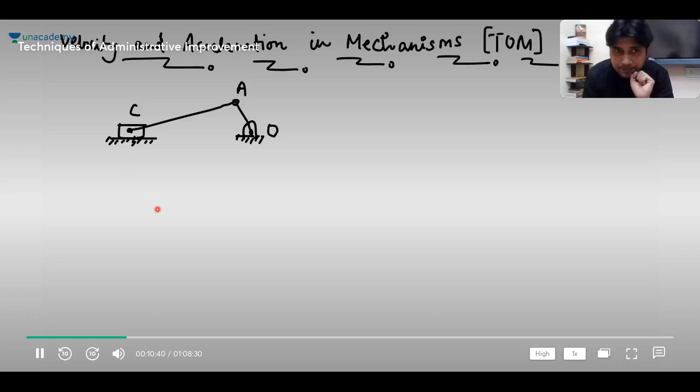In case of slider crank chain, you have a fixed center here and you have a slider here. Let me call this point as O, and let me call this connection here as A, and let me call this connection here as C.

Now let us say, please be very attentive and try understanding, because the approach that I'm going to tell you is a little new. I mean, new in the sense that you may not have learned about it, and it will require a little practice, but it's a no-brainer approach. No-brainer means once you write the very first equation, then it is a mathematics thing. You need to differentiate, differentiate, differentiate. That's it.

Suppose this connecting rod has the angle phi. And suppose this crank has got the angle theta. So please be very attentive and try understanding. Suppose the connecting rod has got the angle phi and crank has got the angle theta. Okay. And the position of the piston at any given instant is x.

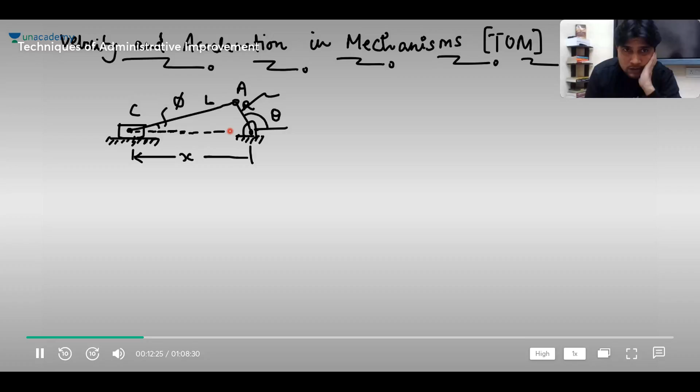Now suppose the length of the connecting rod is L and the length of the crank is R. Can you relate X and L and R? It's very easy. Think about it. My dear friends, if you drop a perpendicular here, then it's very clear. Please be very attentive and try understanding that this is L cos phi, and this one is R

cos (180 minus theta). This red one is L cos phi, and this blue one is R cos (180 minus theta). And this entire thing is what? This entire thing is X. X is the position of the slider at any given instant. Okay. This method is so beautiful that you don't have to learn a lot of theory. You can just begin right away.

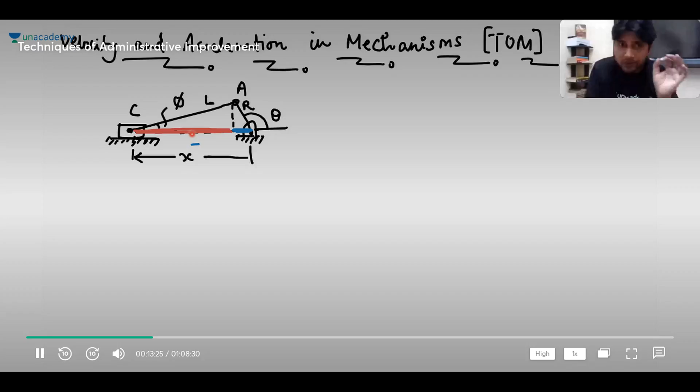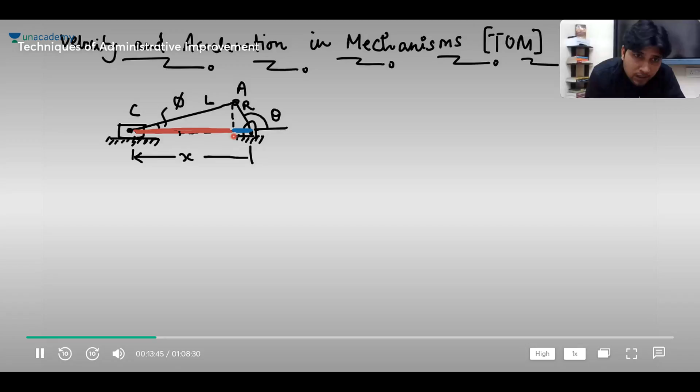You can start right away. You can very clearly see that this red one is L cos phi and this blue one is R cos (180 minus theta). And my dear friends, this L cos phi and R cos theta is nothing but X. So you can write X is equal to L cos phi plus R cos (180 minus theta).

Why we have not taken crank angle outside? R cos (180 minus theta). Thanks for correcting me. R cos (180 minus theta). Sir, it's a usual practice to represent all the angles from any one given direction. Like if you're choosing positive x, then measure all the angles from positive x. Just follow this. Okay.

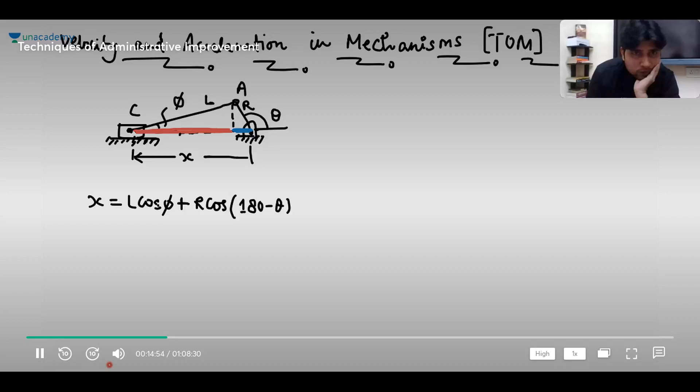So those who have joined late, let me tell you clearly once again that I'm not going to discuss any diagram approach and all. I'm going to tell you velocity and acceleration through a very fantastic method, and that fantastic method is known by the name constraint equations.

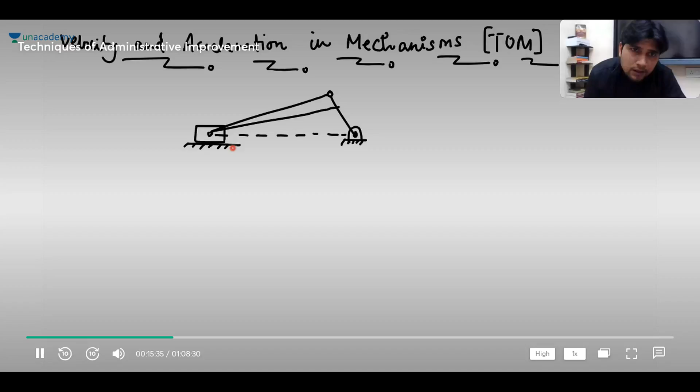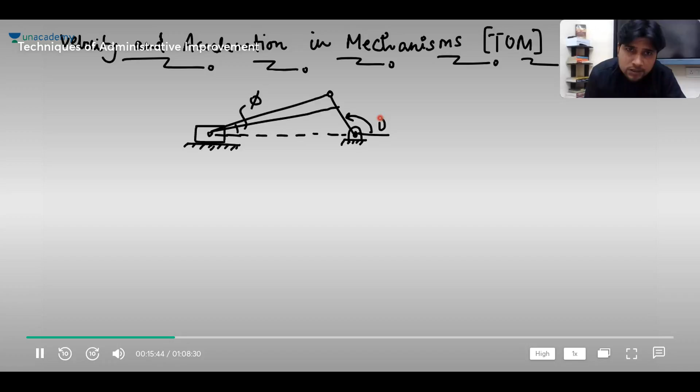So those who have joined late, please join the class as early as possible and try understanding. What we are doing here is that there is this slider, there is this crank and there is this connecting rod. I assume the angle of the connecting rod is phi, and the angle of the crank at any given instant is theta. The length of the connecting rod is L, the length of the crank is R, and this point here is the connection between the connecting rod and crank. And let's say the position of the slider at any given instant is X.

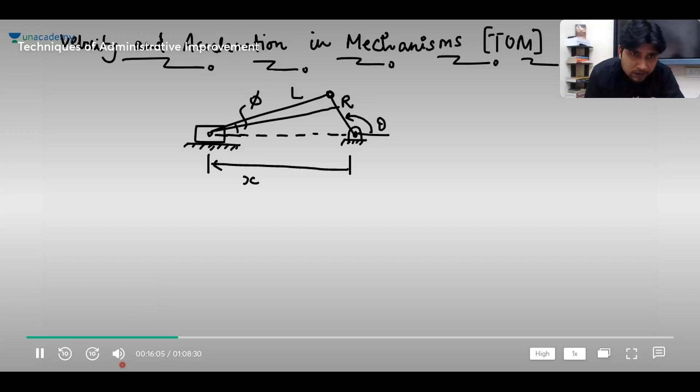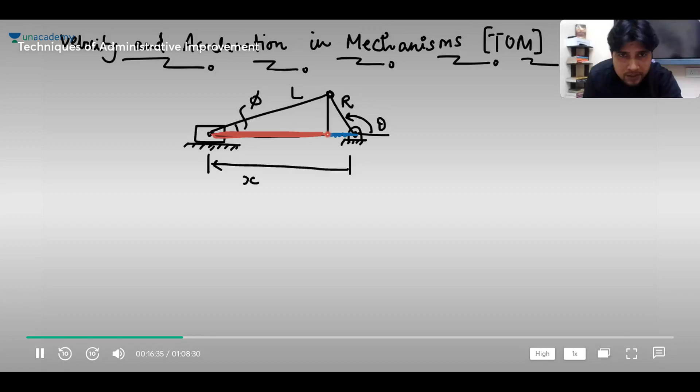Now listen, I'm saying it once again. This length is what? Drop a perpendicular here. Then this red one is L cos phi. And what about this blue one? This blue one is R cos (180 minus theta). But total is what? Total is equal to X.

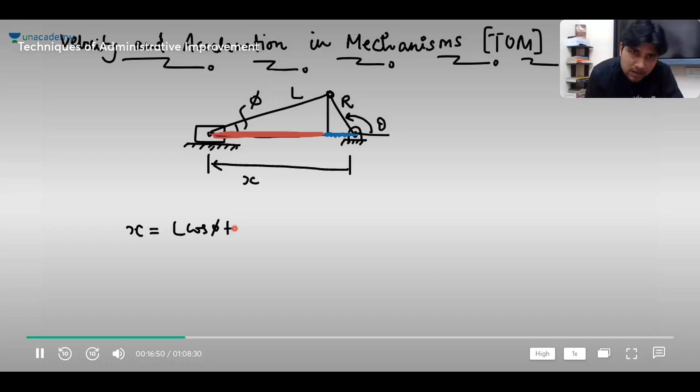So you can simply write X is equal to L cos phi plus R cos (180 minus theta). Isn't it? L is a constant, R is a constant, but theta, phi, and x, they are the variables. L and R, they are constants, okay? And there is one more equation that you can write.

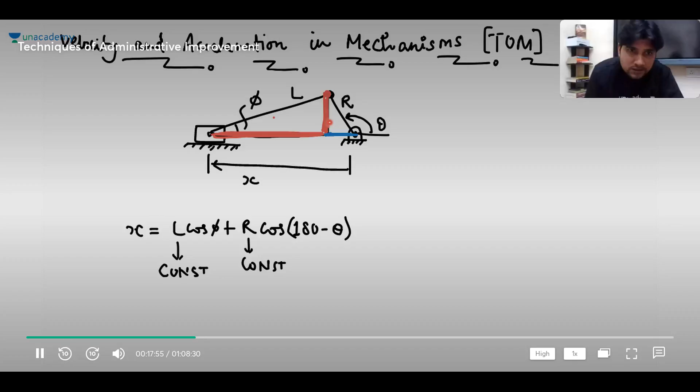Once again, look at this triangle and tell me, in this slider crank mechanism, what is this vertical distance? This vertical distance is L sine phi. But wait, this vertical distance can also be written as R sine (180 minus theta), isn't it? So this vertical distance can be written in two ways. One is L sine phi, another is R sine (180 minus theta).

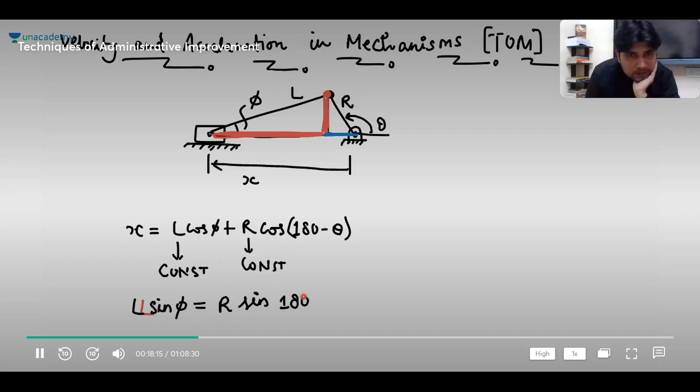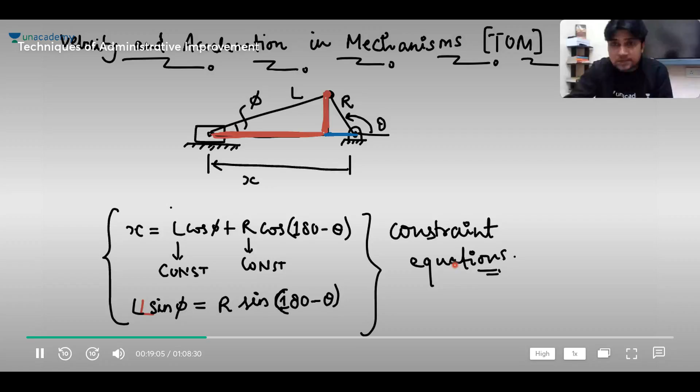I like this approach because in this approach, we don't have to take any component, we don't have to take any diagram, we don't have to sketch anything. Just write these equations and differentiate them. If you differentiate them, you'll get velocity. And once you get the velocity equation, differentiate again, you'll get the acceleration. These equations, my dear friends, are known by the name constraint equations. But please don't try to use these equations in mechanics when a free body is moving, because these equations will be available only in TOM problems where you have a constraint mechanism.

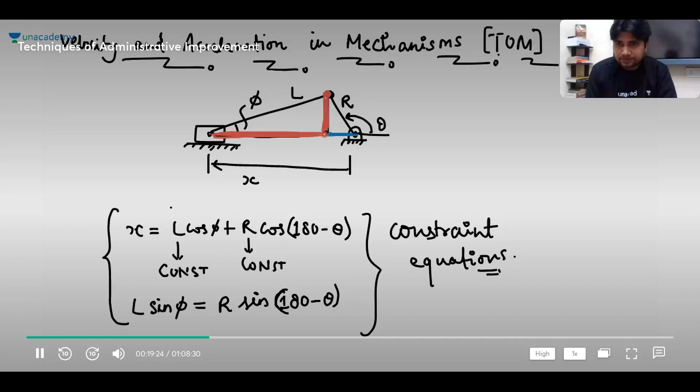Okay, so let me try solving a problem and you will understand how this works. I just gave you one example. Let me very quickly try solving a problem and you will understand. Okay.

Sir, what is a constraint mechanism? Look, Yashwant, constraint mechanism is the mechanism that is having 1 degree of freedom. I'm glad you asked. A completely constrained mechanism is a mechanism with degree of freedom 1.

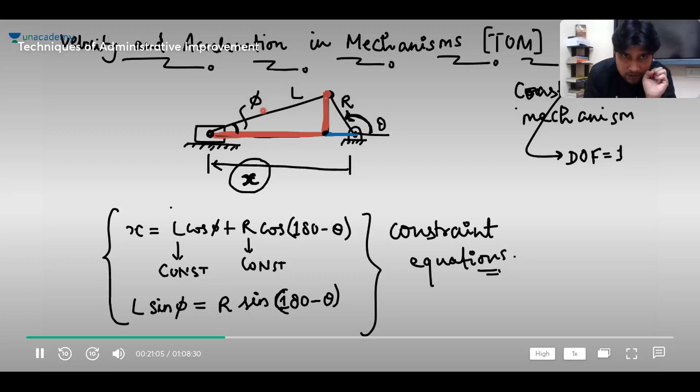What is the implication of this? The implication of this is, look, here you have three displacements. One is the linear displacement of piston, another is the angular displacement of connecting rod, and third one is the angular displacement of the crank.

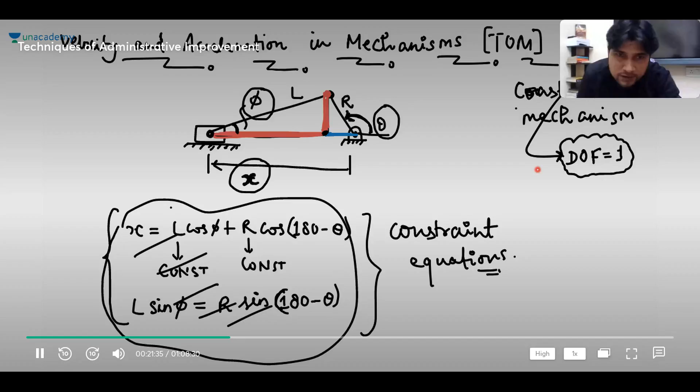If three unknowns can be related with two equations, then how many independent parameters are left? Only one independent parameter is left. That means if you know x, then you can calculate theta and phi. Two equations, two unknowns. One is the correct answer. I asked independent displacements. Independent displacements are one only. Okay. So let me solve a problem and you will understand.

Let me solve a problem. Here we go. This is the problem that we have. As a very first problem, we'll try solving this. Is that visible or shall I make another diagram? That must be visible. Okay. Visible, cool.

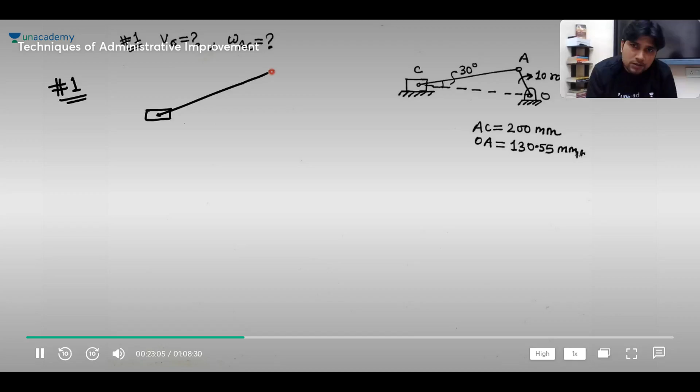Okay, listen and try understanding. Guys, you have this slider, and you have the connecting rod, and you have the crank.

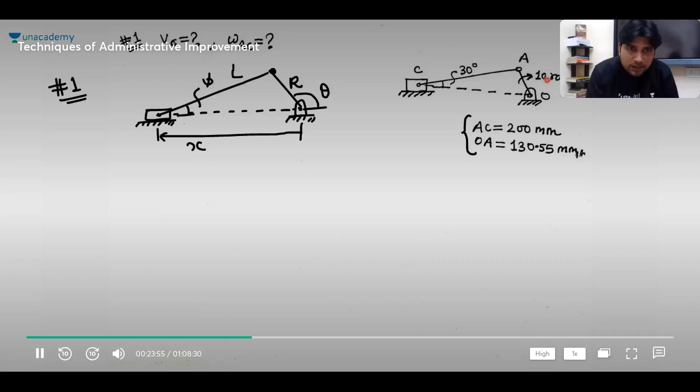And I told you that this is the X position of the slider, and this phi is representing the angle of the connecting rod and this theta is representing the angle of the crank. The length of the connecting rod is given as 200 and length of the crank is given as 130.55. If the crank is rotating at 10 radian per second, we need to calculate velocity of slider and we need to calculate angular velocity of connecting rod.

Now, if you want, you can do it. There are so many methods available, believe me. But as I said, I always prefer constraint equations. What are the constraint equations? Please focus yourself here and try understanding. Guys,

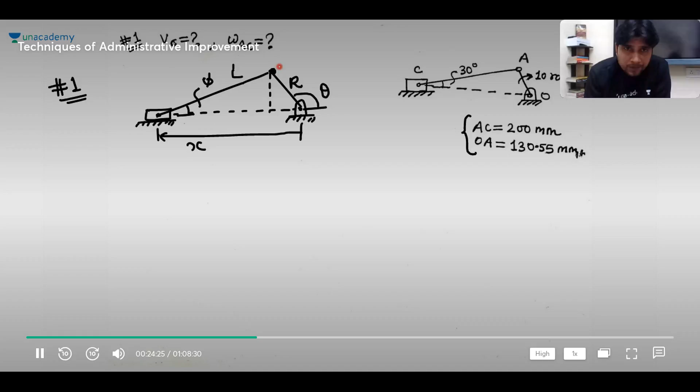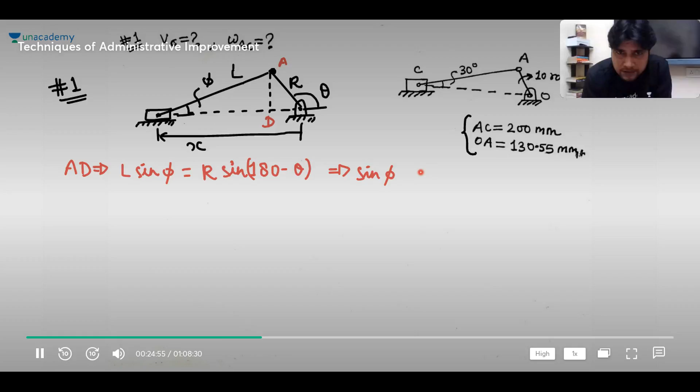this vertical distance AD can be written as L sine phi, and this vertical distance AD can also be written as R sine 180 minus theta. But you know, sine 180 minus theta is nothing but sine theta. So you will get sine phi is equal to R divided by L sine theta.

This vertical height AD, looking at this triangle, can be written as L sine phi. And looking at this triangle, जिसमें मैं point बना रहा हूँ, it can be written as r sine 180 minus theta. इस तरह की इक्वेशन को कहते हैं constraint equation. Such an equation is known by the name constraint equation.

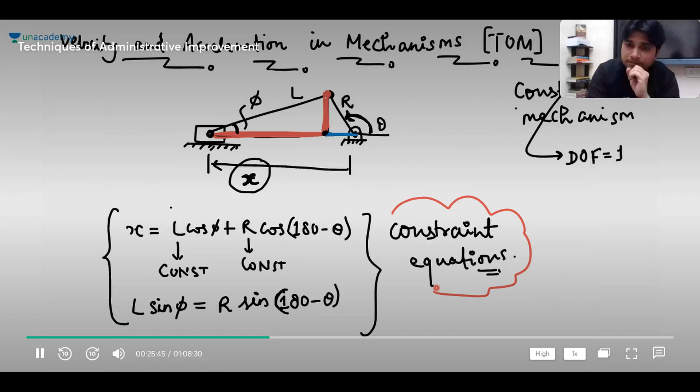Okay. Now you differentiate this quickly. If you differentiate this, sine phi differentiation will become cos phi, and the differentiation of phi is nothing but the angular velocity of connecting rod. On the right hand side, differentiation of sine theta will become cos theta, and theta derivative is nothing but angular velocity of crank.

Okay, so all the values are known to you. You are interested in angular velocity of connecting rod, the rate of change of the angle of the connecting rod. Remember, phi is for connecting rod, so derivative of phi will represent angular velocity of connecting rod. So this will become cos theta divided by cos phi, and r by L and theta dot. You get

very easily everything. Theta is what? Believe me, as of now, theta is 130 degrees in this figure. I'm proving it. And phi is what? Look here. Phi is 30 degrees. Please don't put the values before differentiating, okay? Put the values only after differentiating. And R is what? R is 130.55. And L, the length of the connecting rod, is 200.

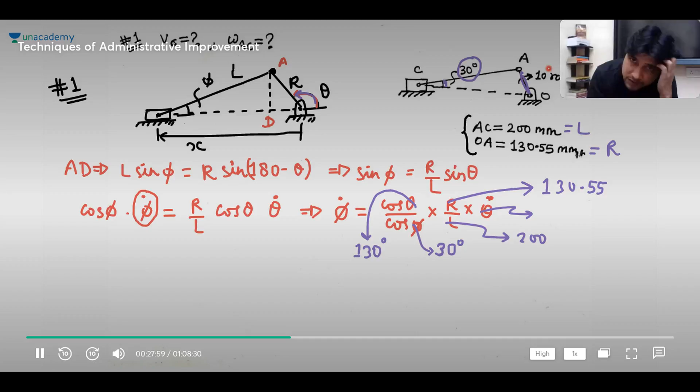What is the angular velocity of the crank? It's given as 10 radian per second. Please calculate the angular velocity of connecting rod. So whenever in a slider crank chain they give you the angular velocity of crank and they ask the angular velocity of connecting rod, just do this and you'll get the answer in one line. 7.542. 7.42. I don't think so.

Cos 130 divided by cos 30 into 130.55 divided by 200 and into minus 10. Yes, all of you are correct. Perfect. This is minus 10. I will tell you why minus 10, don't worry about it.

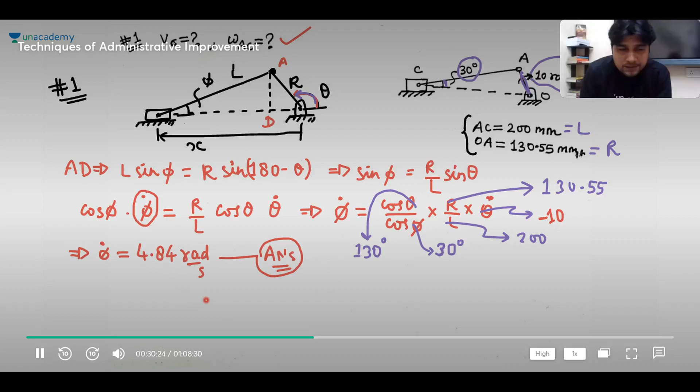So if you put this as minus 10, then you will get phi dot positive 4.84 radian per second. This is the answer of this part. Cool. Let me just enclose it.

Now, one thing I have not explained so far is that theta is 130 degrees. Why it is 130 degrees, I will explain. But first of all, let me write another constraint equation. Another constraint equation is, look, L cos phi plus R cos 180 minus theta is equal to X.

How sine phi became, I differentiated sine, so it became cos, then again the differentiation of phi. Similarly, differentiation of sine has become cos, and then again the differentiation of theta. Perfect. Okay.

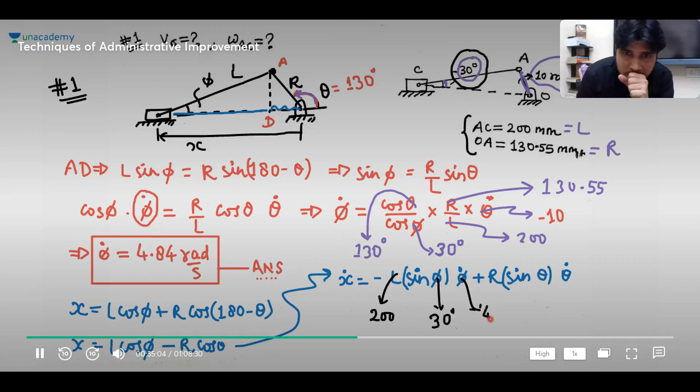L is 200, phi is 30 degree. Look here. In the given figure, phi is given as 30 degree, and phi dot we have obtained as 4.84, and R is given as 130.55 and theta is 130 degrees. And what is the angular velocity of the crank? Angular velocity of the crank is minus 10.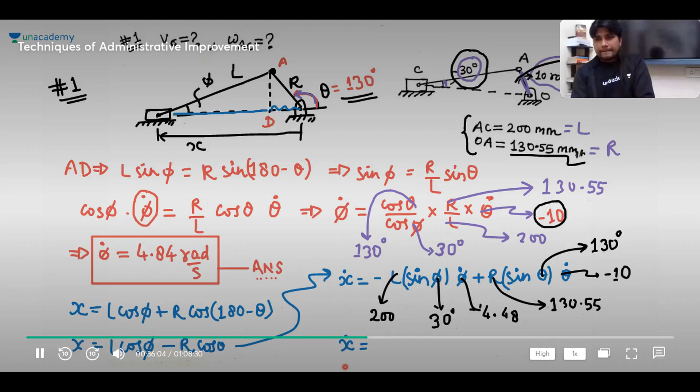Now, one thing that will confuse you immediately is why I'm putting theta dot as minus 10. I will tell you. First of all, you solve this and tell me what exactly are you getting. Minus 1.48. That's perfect.

I'm a student from Delhi Center. Great. Delhi people have always been very close to me.

Okay, so is theta given in the question? Phi is given in the question. How theta I have calculated, I'll tell you. Don't worry. Look here, phi is given, okay? You're getting minus 1.48. Same answer got by I center.

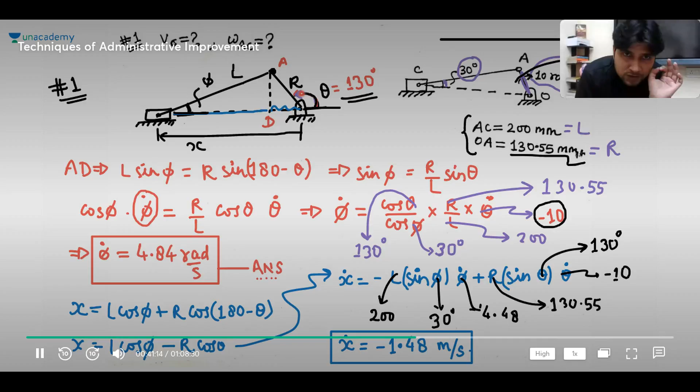The very first thing. Now the second thing. If your actual angular velocity happens to be opposite to the theta, then put it negative. These two things you must remember. Okay? We solved this problem by using the constraint equation.

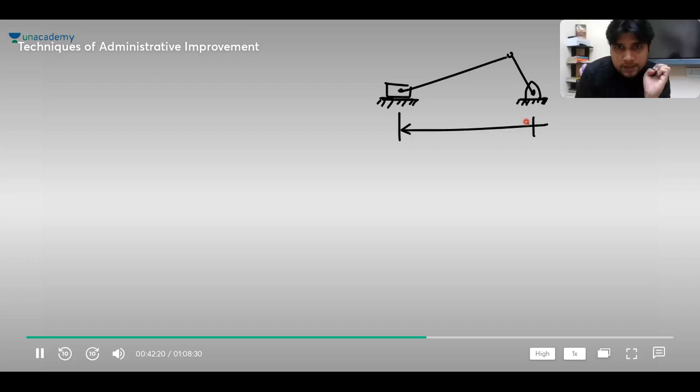Now Susant asked, please explain it once, as to how I wrote this x is equal to L cos phi and R cos 180 minus theta. This is very easy to understand. Don't worry.

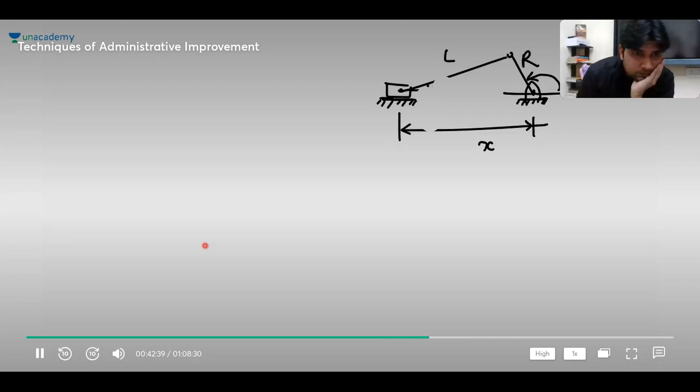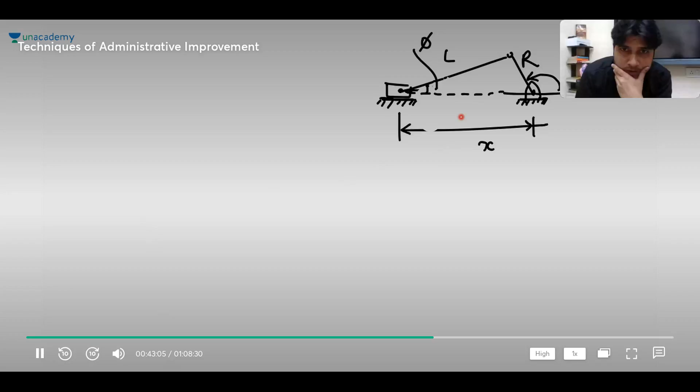Theta is minus 10 degree? No, it is not minus 10. Listen, listen. You guys listen first, then you will understand. Now, Sushant and all other people out there, you tell me, what is this distance? If you drop a perpendicular here, what is this horizontal distance? This horizontal distance is very clearly L cos phi.

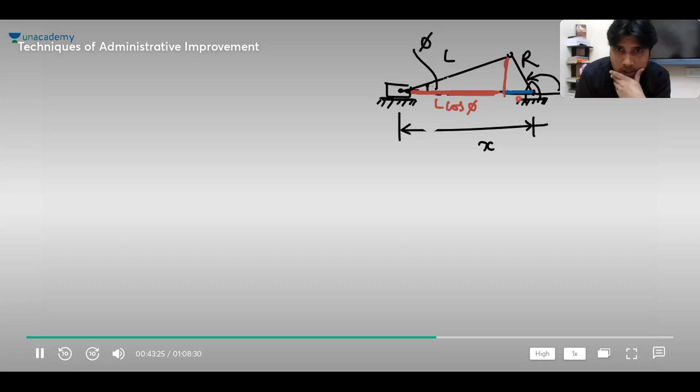And what is this horizontal distance? This horizontal distance is very clearly R cos this angle. This angle is what? This angle is 180 minus theta. Isn't it? 180 minus theta. So now I can write x is equal to L cos phi plus R cos 180 minus theta.

Simple. And then I differentiated, x dot is equal to L, differentiation of cos phi became sin phi times phi dot, differentiation of cos 180 minus theta is, okay, I've done it already. All these things. I say it once again. Please do remember two important things.

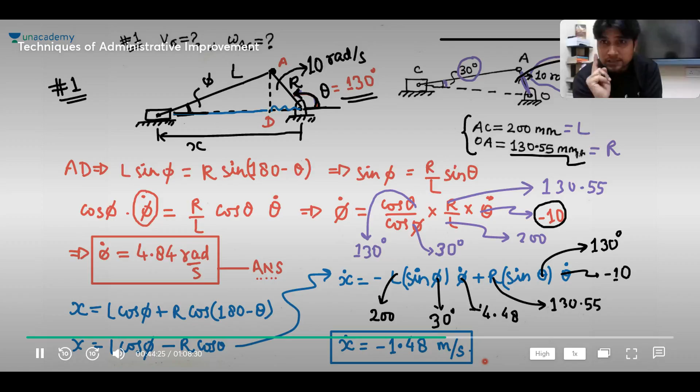Number one, all the angles you will measure from positive x-axis only. Number two, if your given angular velocity is opposite to the sense of the angle, then that angular velocity you will put negative. Okay? Got it? Cool.

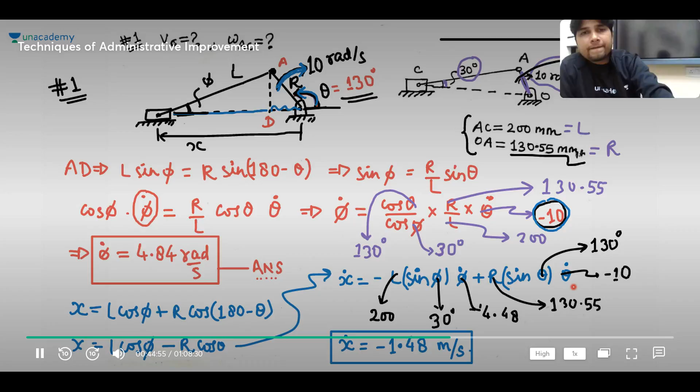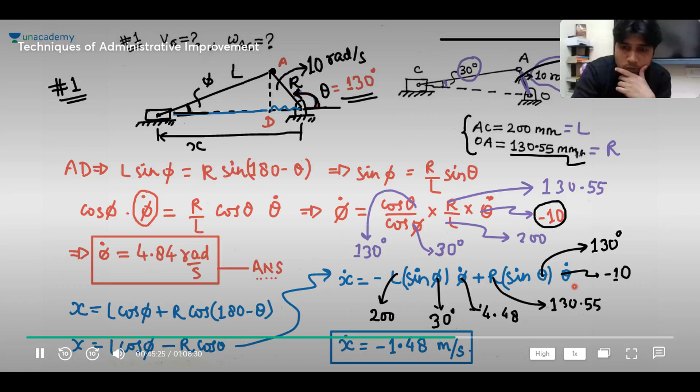Theta 130, I'm coming to that. Why theta is 130 degrees? I'm coming to that. Look, you have this angle given as 30 degree. This is 200 and this is 130.55. Let's say this is alpha.

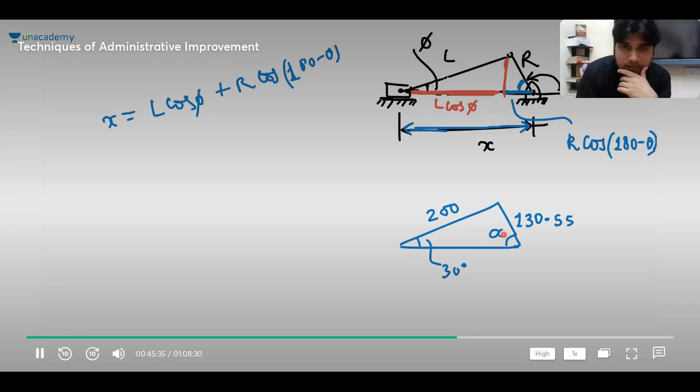Then apply the sine rule. What is the sine rule? 200 divided by sine alpha is equal to 130.55 divided by sine 30 degrees. Okay, somebody please calculate alpha quickly.

Swami is saying mechanical engineering class. Swami, yes, it is mechanical engineering class. Did you happen to be in the wrong class?

Where's the doubt in this? Now alpha is 50 degrees, so what will be this angle theta? Tell me, if alpha is 50 degrees, what will theta be? Very simple, now you understand. Theta will be 180 minus 50, which is nothing but 130. Perfect.

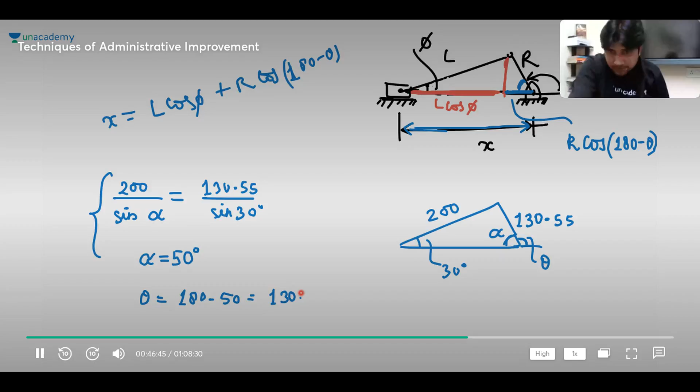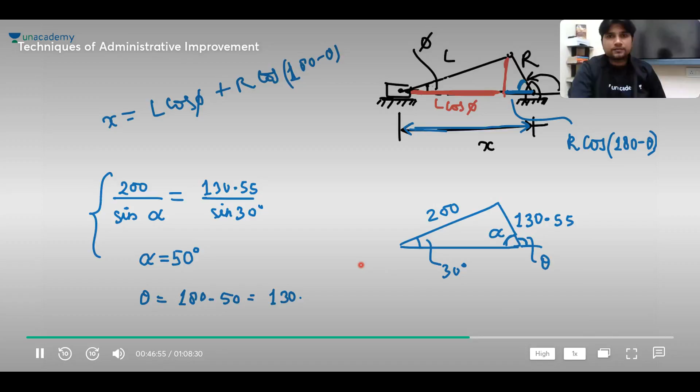Balaji, you asked if this is valid only for a single slider crank chain. So the answer is no. Here you have a double slider crank chain, and the velocity of slider A is given.

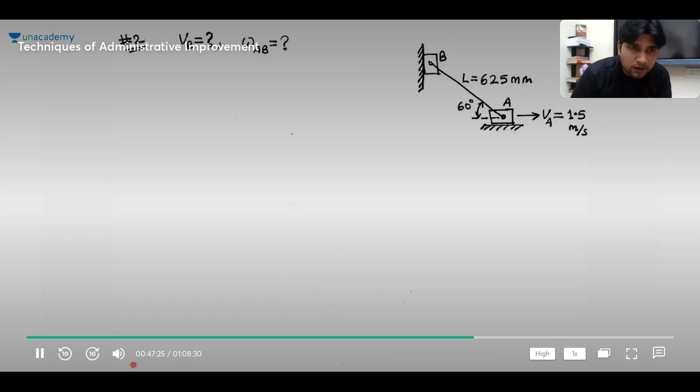Look guys, try understanding the question first. As a second question, I'm taking this one: velocity of slider A is given, and we have to calculate velocity of slider B. We also have to calculate the angular velocity of this rod AB.

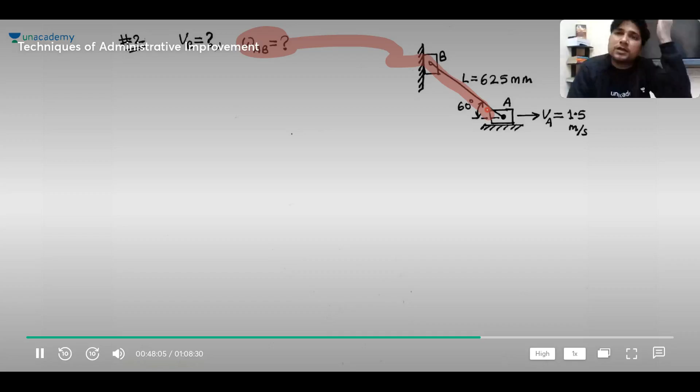Has your contact number changed? No, no, no, my contact number is the same.

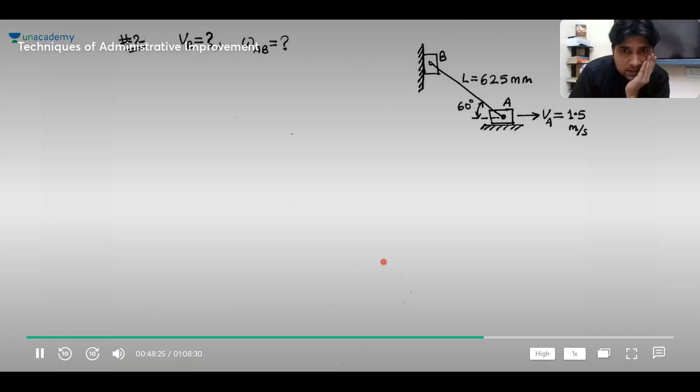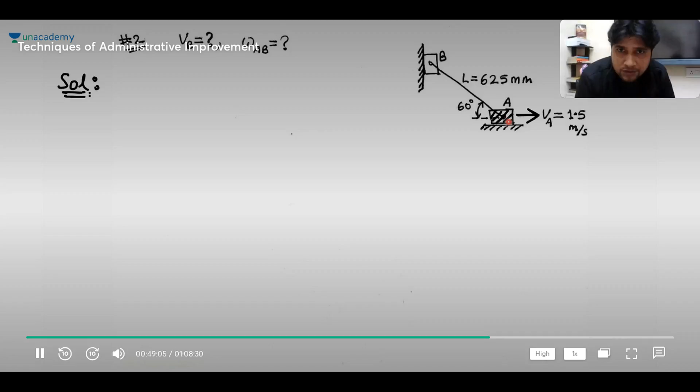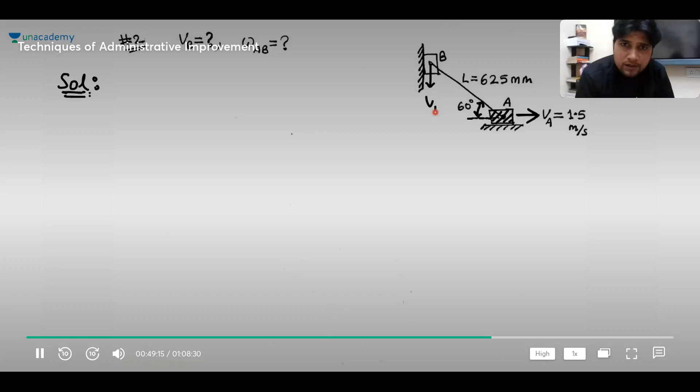Because you are learning a new method, a newer approach for velocity and acceleration, that's why I'm taking a little extra time. Now listen and try to understand. Here we have a double slider crank mechanism. Slider A is moving at 1.5 meter per second. At this given instant, when the rod makes an angle of 60 degrees, what will be the velocity of slider B, and what will be the omega?

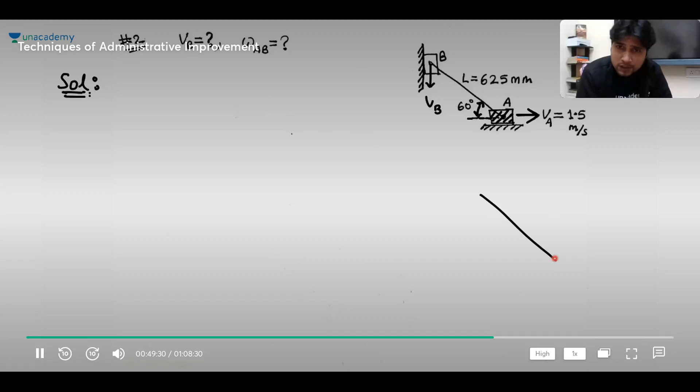You can solve this in so many ways: velocity method, instantaneous center method, relative velocity diagram. But I'm going to use a constraint equation. This point A is moving to the right side at 1.5 meter per second. Let's say the position of point A with respect to a fixed point at any given instant is x.

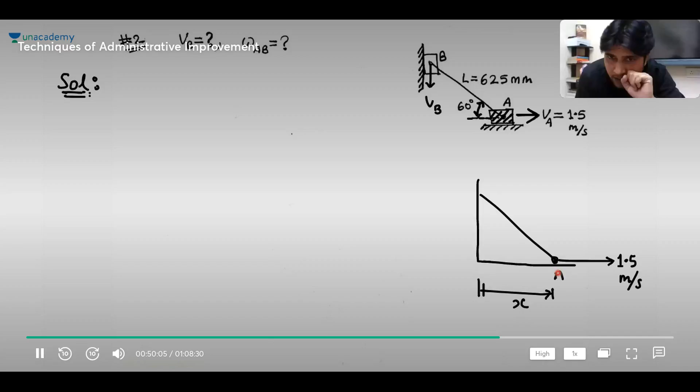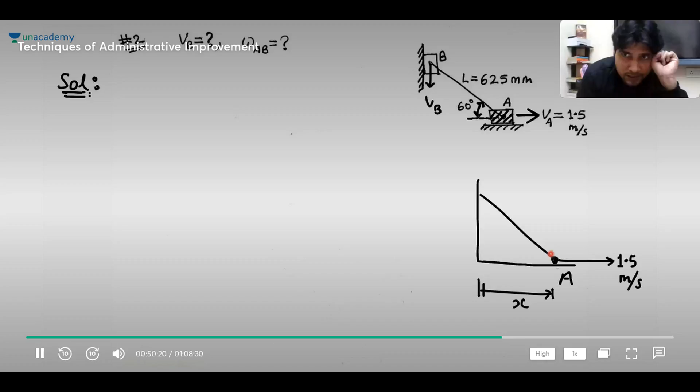As point A moves to the right, point B will move downward, isn't it? Just like a ladder slipping on the floor - if the ladder slips on the floor like this, where will the top point go? The top point will come down, it will come down. Let me assume the position of this topmost point. If A moves to the right side, then B will move down, not right.

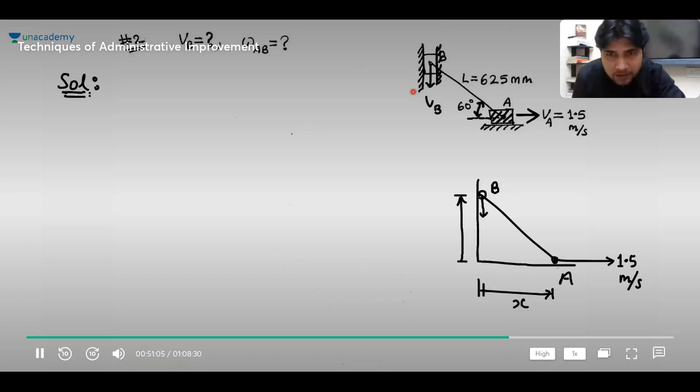It's a constraint thing like this, for a double slider. So point B will come down. Let's say at one given instant the position of B is Y, and let's say the angle of this rod is theta.

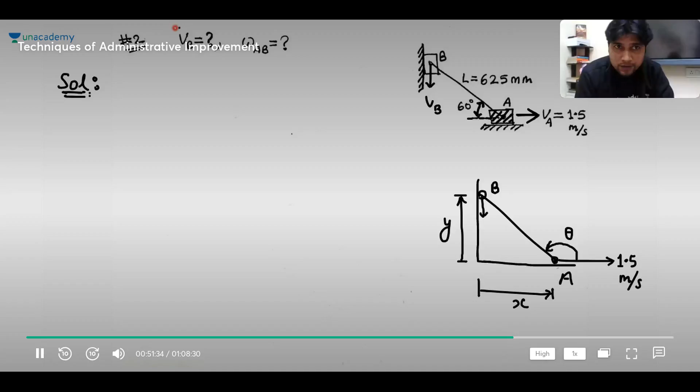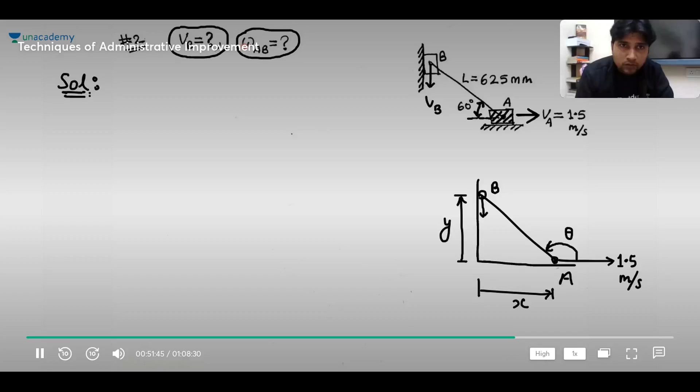Now tell me, you have to find out two things by the way: the velocity of slider B, and the angular velocity of the connecting rod. So can you relate x and theta and L?

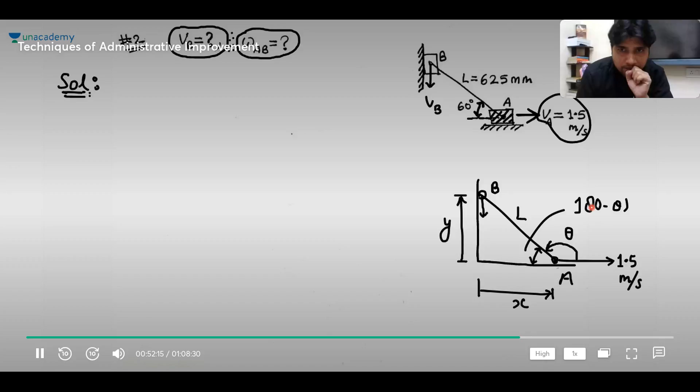It's very easy, because x's velocity is given, so that's why I'm focusing on x. Can you relate this x and this 180 minus theta and L? That's very easy: x divided by L is equal to cos(180 minus theta), and cos(180 minus theta) is nothing but minus cos theta.

Now this is the constraint equation, because I'm relating two positions, two displacements here: one is the displacement of the slider, the other is the angular displacement of the connecting rod. This is what you call a constraint equation.

Now differentiate this quickly. If you differentiate this, you will get the derivative of x, and on the other side the derivative of cos theta will become sine theta, and then the derivative of theta will become theta dot.

Now, what is x dot? X dot is nothing but velocity of slider A, and this is given to you as 1.5.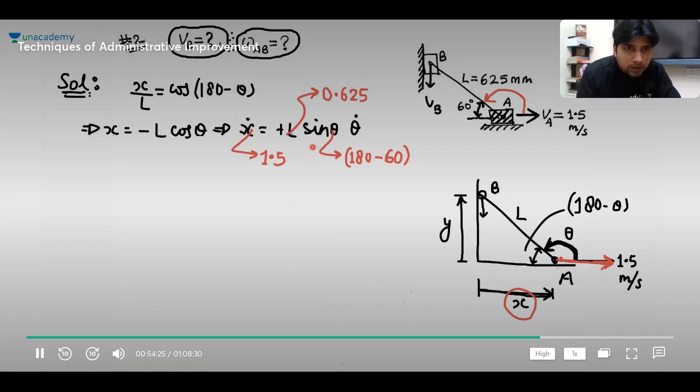Theta is nothing but 180 minus 60. Calculate theta dot from here because length is given, 0.625. That will give you the angular velocity in one line.

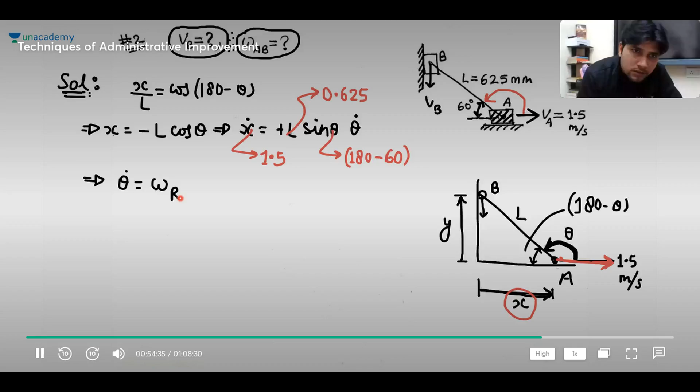That will give you the angular velocity of the rod in one line. You get 2.77, which is 1.5 divided by 0.625, further divided by sine 120, giving 2.77 radian per second. Now, what about the other one?

For the other one, you try bringing y into the picture. To get the velocity of slider B, you try relating y either with theta or with x. It's up to you. Now both are known.

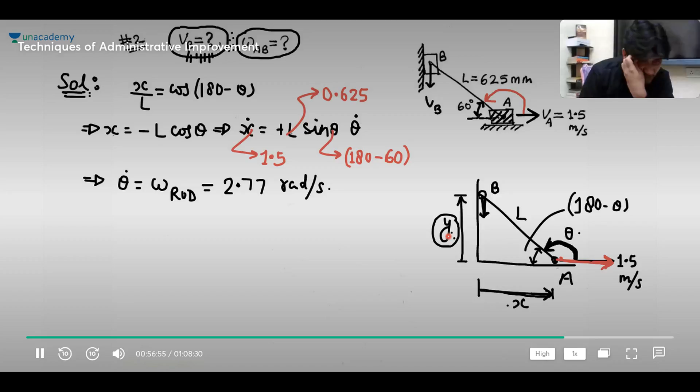So it is up to you. You can relate y with anyone. It is totally up to you.

So which one will you prefer? Well, I think in the second part of the solution, I'm going to prefer with x and y. I know you're going to prefer my method, but in my method also you have two choices available here. One is you can try relating y with x, or relating y with theta.

And why are both going to work? Because we have theta angular velocity also known now, so both will work, but I'll relate y with x.

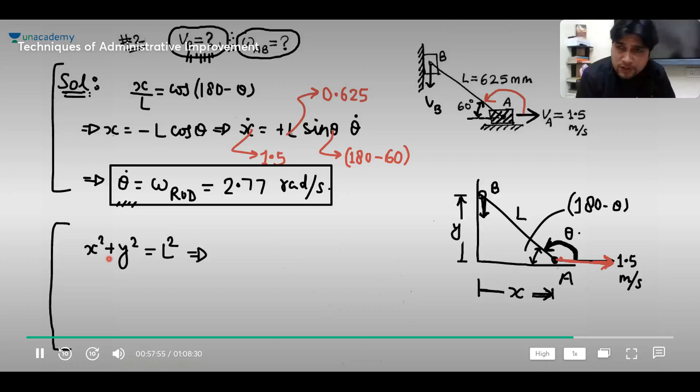X square plus y square is equal to L square. Differentiate this. If you differentiate this, you get 2x. And what is the derivative of x? Derivative of x is x dot.

If you differentiate y square, you will get 2y. And what is the derivative of y? Derivative of y is y dot. And what is the derivative of L square? Derivative of L square is 0.

Now, two cancels with two. What is left? X x dot plus y y dot is equal to 0.

Then you will have y dot is equal to minus x divided by y, times x dot. What is x dot? X dot is the velocity of A, and this is already known to you.

1.5. What is x and y, guys? X is, at the given instant, x is 625 cos theta, which is 625 cos 60. And y is 625 sine 60.